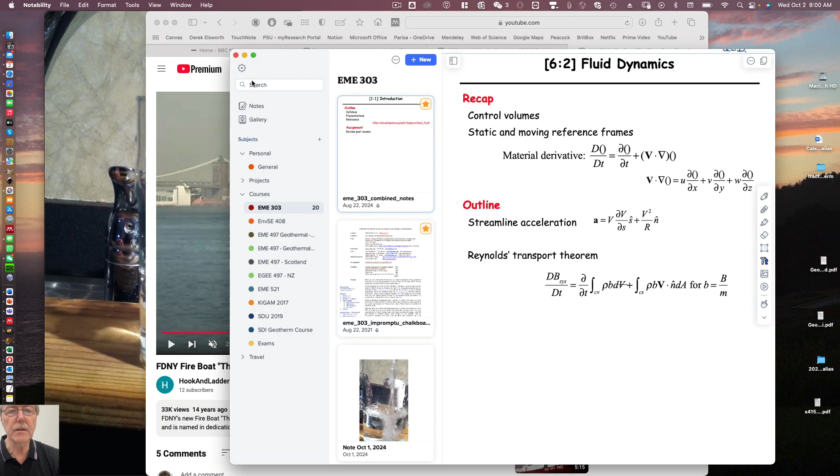And so the relative velocity is what we sometimes need to use to be able to take care of that. So we have to think about frames of reference. And so these two things demonstrate exactly that. And so that was Monday's online stuff. So we'll do a quick recap of what's going on.

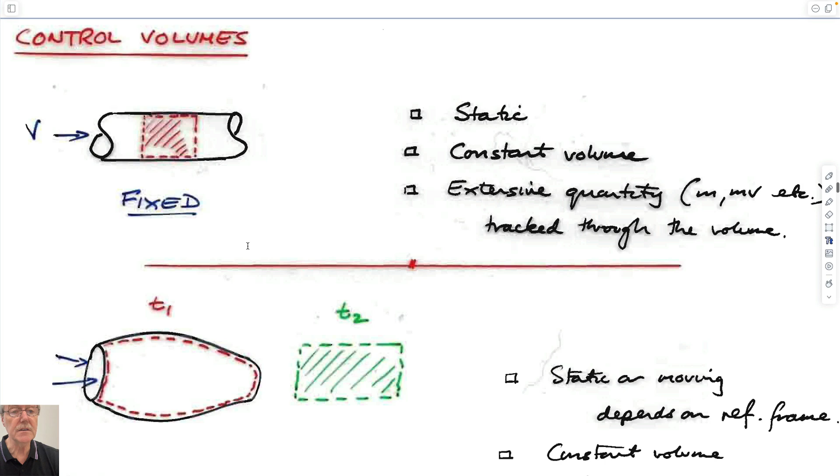Yeah, so the best diagrams to explain it are these. And so what we'll talk about today, now that on Monday you have some command of reference frames, is we'll talk about conservation of mass. Mass in minus mass out equals accumulation. And so we'll define some control volumes.

And these can be of three flavors, shown here. One is a fixed and static control volume, so it's fixed and constant volume. If you look at flow in a pipe, you can imagine a section of that pipe, Bernoulli upstream, Bernoulli downstream, has to be steady state. So the same mass flow rate has to be going in as is coming out if you're not accumulating material on the inside.

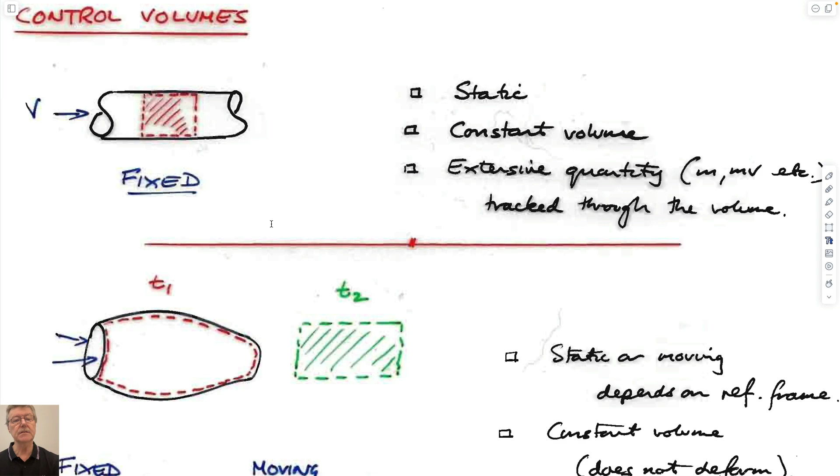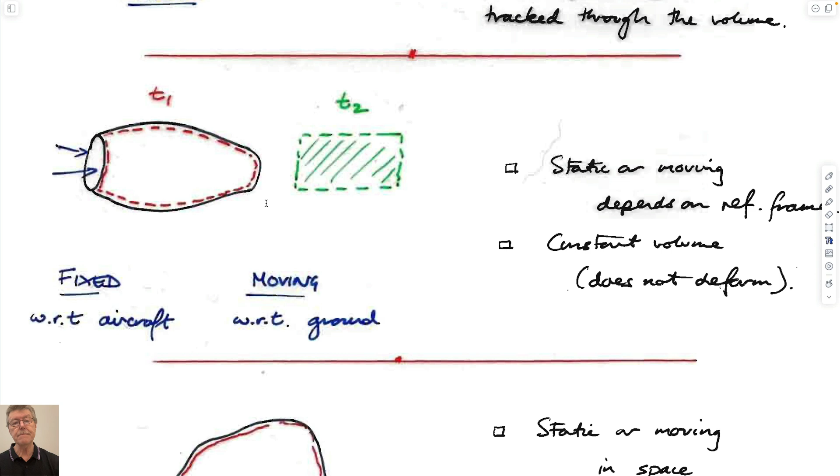You could think about a constant volume container, but one which is physically translating. So constant volume but translating, like a jet engine, I suppose. If it's sitting on the runway, then it's static. If it's moving along the runway or in the air, then it's physically moving from one location to another. And moving and deforming would be blowing up a balloon and just releasing it.

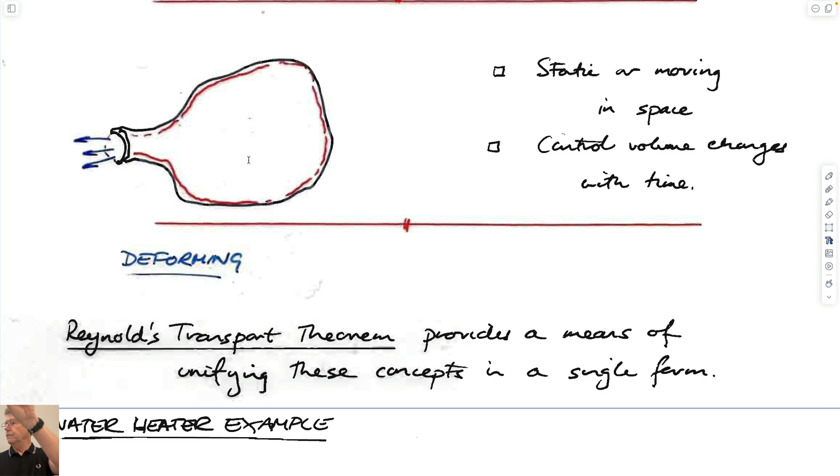You know exactly that two things will happen: it will be mobile because it will have a jet coming out of it, and it will also change its volume as it loses volume of air within it. So the reason we want to think of those three volumes is that those are the gamut of what we have: static and not changing volume, moving and not changing volume, and moving and changing volume are the three permutations of that behavior.

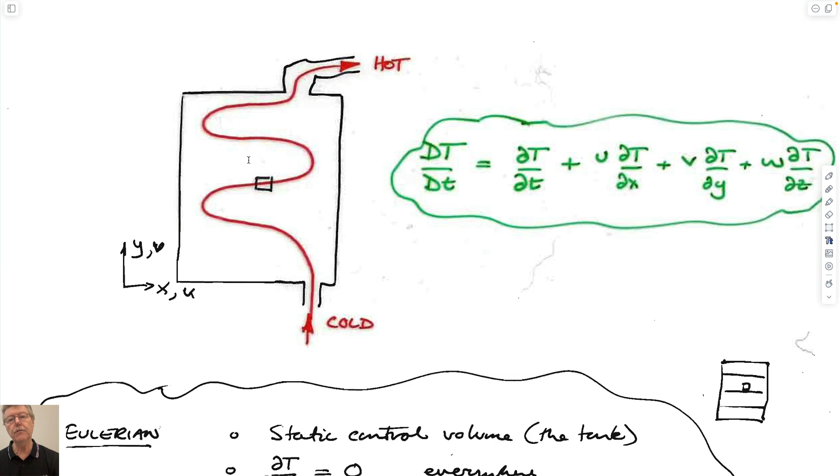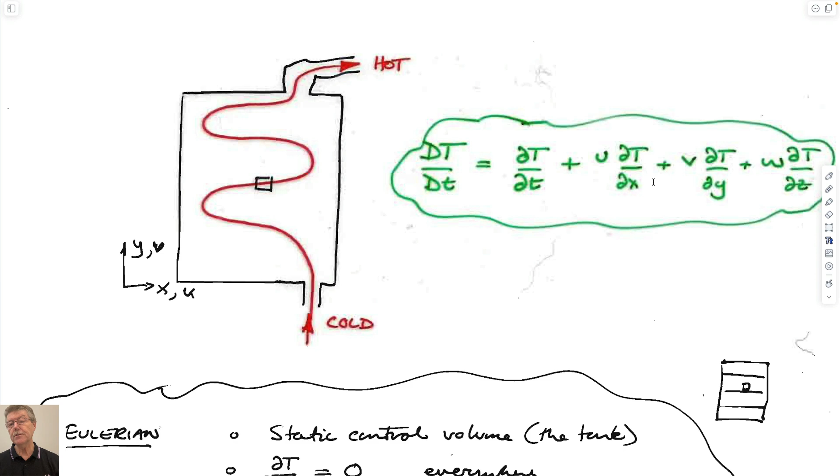We talked about material derivatives last time, and we'll cover that just very briefly this time. The example was a change in temperature as you go down into the earth. When you drill well bores, you often put tools down a well to look at geophysical signatures, gamma ray counts for clays, temperatures if you're prospecting for geothermal reservoirs. If you go down in a hole, the temperature you'll see if attached to that sonde would be a change in temperature with time, but you'd like to convert it to a change in temperature with elevation. You can use the material derivative to do that, and we'll follow that today. Won't go back through that.

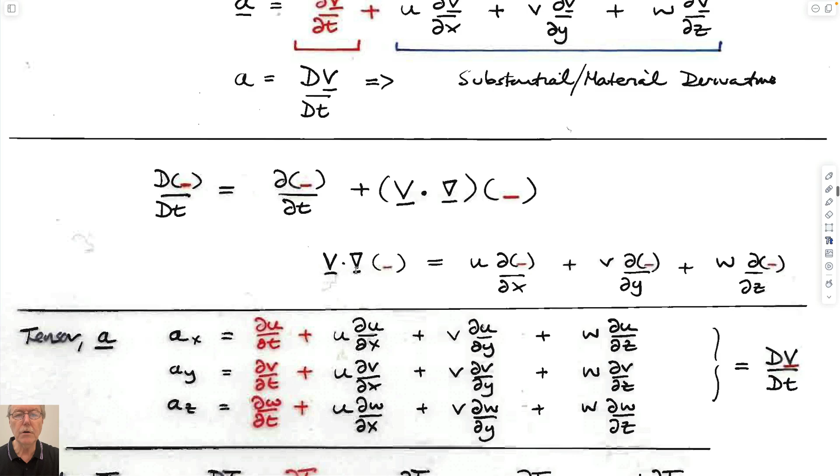For the material derivative, it's merely something that's attached to a person - this would be a mass attached to me as I'm falling through the sky, or Luke as it was. We can define it in terms of a fixed reference frame. We'll do a quick example to reinforce how behavior changes in time and how behavior changes in space. If you know how it changes in time and space, such as in Bernoulli going upstream and downstream, you can calculate how a particle of fluid going through that stream tube would behave in terms of its mass change or velocity change, typically. I won't go through that again, just note that's in the stuff to look at online. And just to reiterate that we've accommodated that here - that's control volume. So we'll talk very briefly about that, and more today.

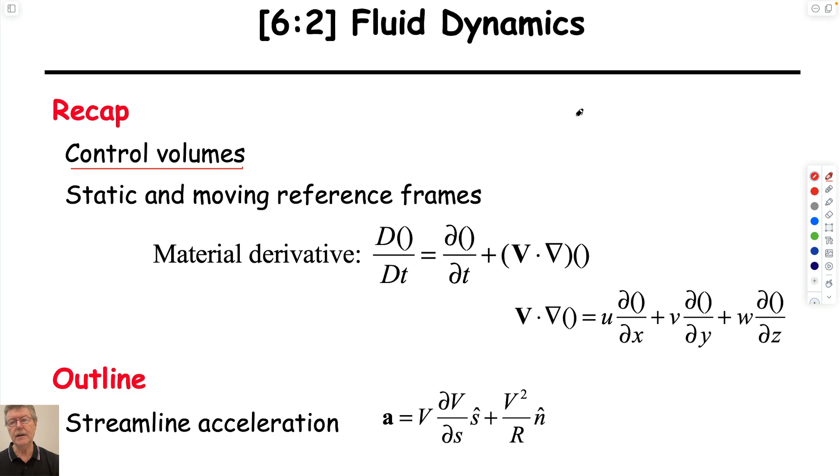The material derivative is pretty straightforward, we've kind of seen it. Perhaps I'll move down here and start again. It's worthwhile getting this lodged in your mind relative to things we've already done. We've talked about free jets, right? A free jet looks like this, and we have water coming out, we have a height. We know a couple of things about a free jet: we know that it accelerates as it goes downwards, and we could write a couple of points here. What did we do before? We called this one uppercase H, and we called this one lowercase h, I think, in the example we did.

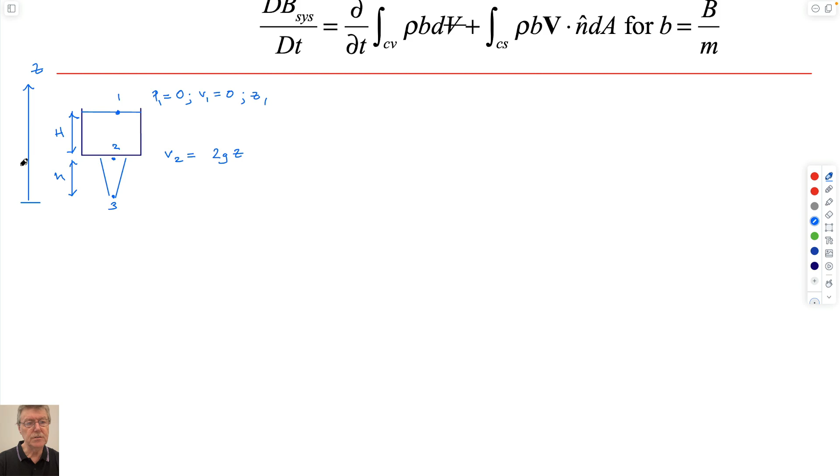We could write points 1, 2 and 3. We know that on this surface, P1 is equal to 0, V1 is equal to 0, because it's a big tank. So we know that Z1 relative to where we take our datum is given by that height. If we choose our datum at this point, we know the velocity at 2 from writing Bernoulli is the square root of 2gz - let's ignore that we're writing z upwards for now. We had also that nothing changes here, so this is also the square root of 2gz. The only difference between these is that this z would be uppercase H, and this z would be uppercase H plus lowercase h - the total distance. Because this is H plus h, this has to be bigger than this.

And so from continuity, V2A2 equals V3A3. So we know that A3 has to be smaller, so it must neck in. We said that.

And we could think of this also as being Luke. Well, that's pretty good, actually, isn't it? And Luke ends up here at some stage. If we magnified Luke to see exactly what Luke's shirt was, what would Luke's shirt say? He's our superhero - he's our substantial or material derivative. And so we know that the forces acting on bodies, which is really what Bernoulli is, equal mass times acceleration.

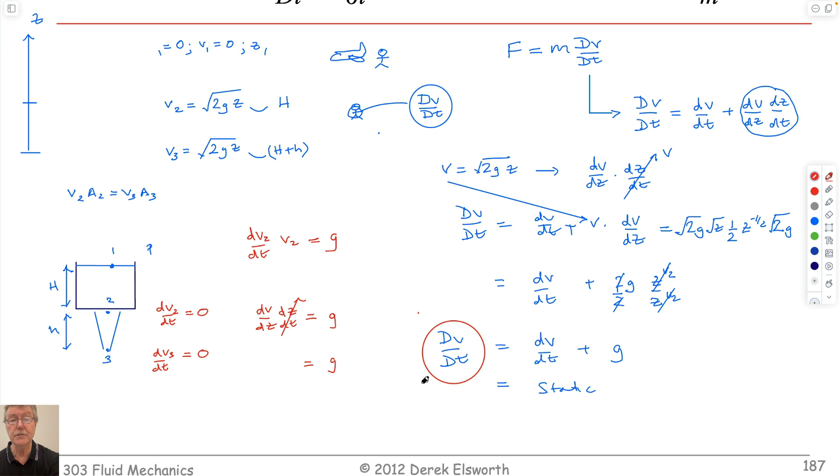So we'll go back to that as we go through it. So that was really what Monday's class was all about.

Did anyone watch Monday's class? Did you see the scores from the question, on the website for 2021? Yeah, we should watch. I was going to say, one reason to see 2021 is you'll see the scores from the first test were something like 28%, 30%, 68% for the first three tests. So based on the averages for your first test, they worked out quite well. Okay, yeah, so it doesn't change much. I just say the same thing each year.

Not very original, I'm afraid.

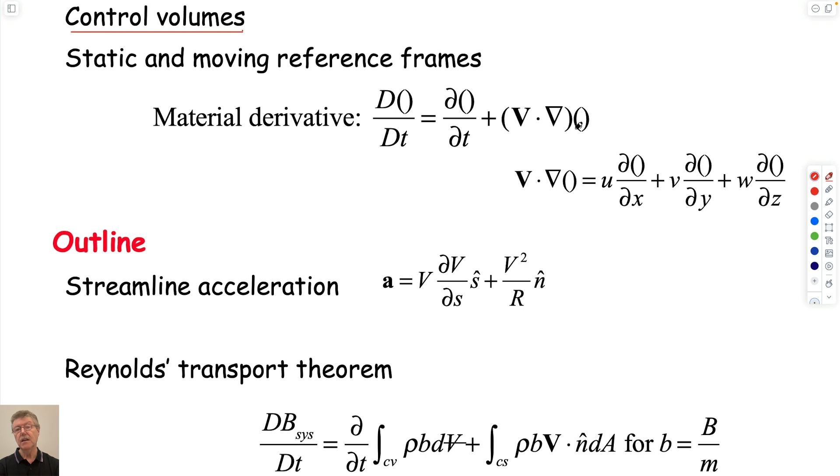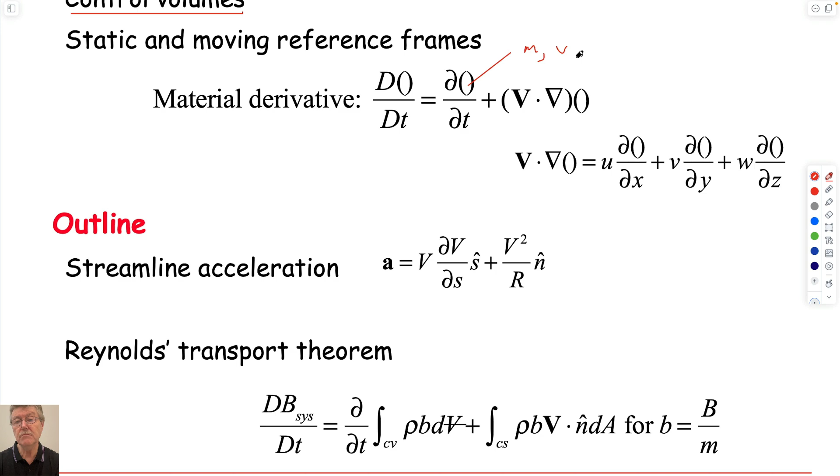So that covers the so-called substantial derivative, also called material derivative. It depends on something, some quantity changing with time. Bernoulli's steady state: if you take a picture upstream and downstream, those quantities aren't changing, and changing in space, which is this second term. And clearly it is changing in space vertically. It can be any quantity - this could be mass, velocity, temperature, or any kind of thing you could use.

Secondly, let's do this relatively quickly - it's a bit esoteric. Streamline accelerations depend on components related to changes in velocity along the streamline, both along the streamline and normal to the streamline. So if we want to work on accelerations, it's easy to draw a figure - streamline accelerations like this.

This is a radius, this is a streamline velocity. This is a streamline vector, this is a normal vector, n hat. This is velocity along a streamline.

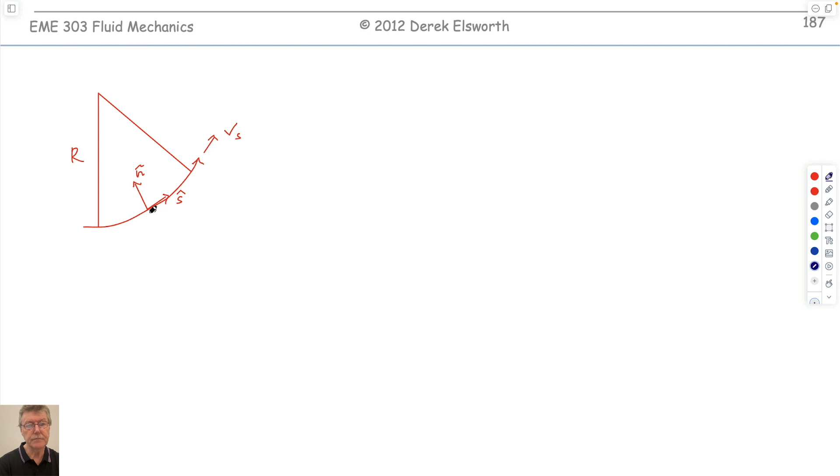And I guess we could write on top of that accelerations in the x direction and accelerations - I think I chose y in this particular case, so let's just choose x and y.

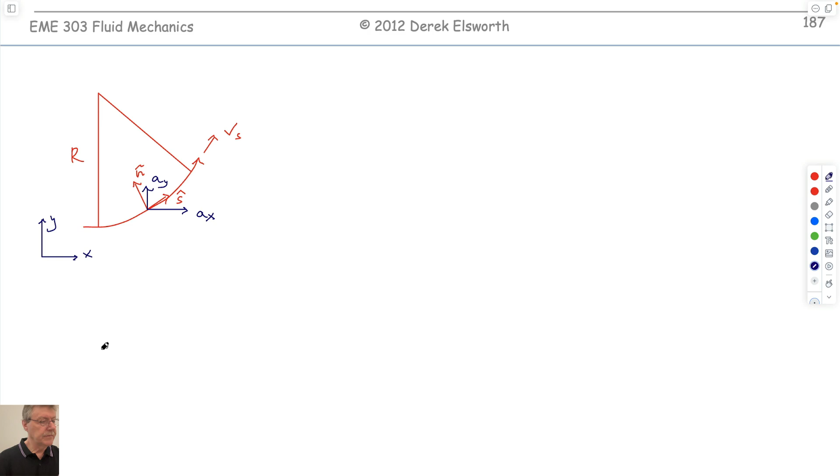And so we know that the velocity occurs along a streamline. Let's see if I can get this to work... I don't know if it'll drag this or not. Oh, no, it's not - fine, I'll just write it out.

So we can get from this: the acceleration along a streamline is equal to the velocity times the rate of change of the velocity along the streamline, multiplied by this vector s, plus v squared over r times a vector n.

And so if we want the velocity, the acceleration - this is a vector in x, y, and z. So we need to know what the components of the acceleration are in terms of along a streamline.

So this vector along the streamline is always a unit vector, of length 1. If we look at the components of that in x and y, we could write this as being 1 and 1, and this then would be square root of 1 squared plus 1 squared, which is square root of 2. And so this is the vector s. We could also divide these through by 1 over square root 2 and 1 over square root 2, so this indeed is equal to 1. And so these would be the components of the vector in each of the x and y directions.

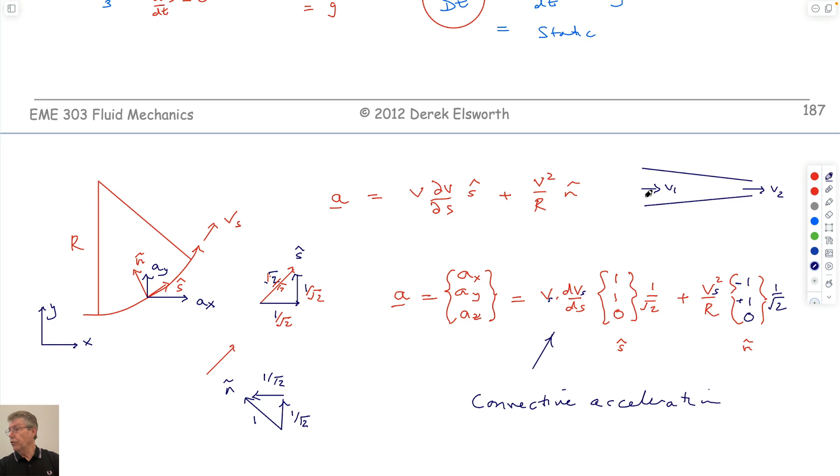What that means is that instead of dv dt, if you're attached to this, it means as you go from upstream to downstream. If you look at the free jet that we had before, we know from continuity that velocity v1 is smaller than velocity v2. So the velocity is changing as we go along a streamline, and it's accelerating. Even though the velocity is constant here and constant here, a packet of water as it is carried downstream is accelerated by this so-called convective acceleration. It means that it's carried in space. So useful to know. So relates to this.

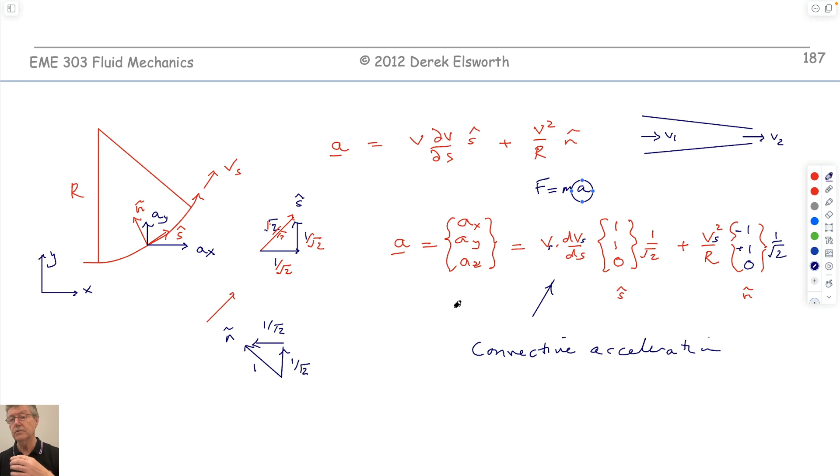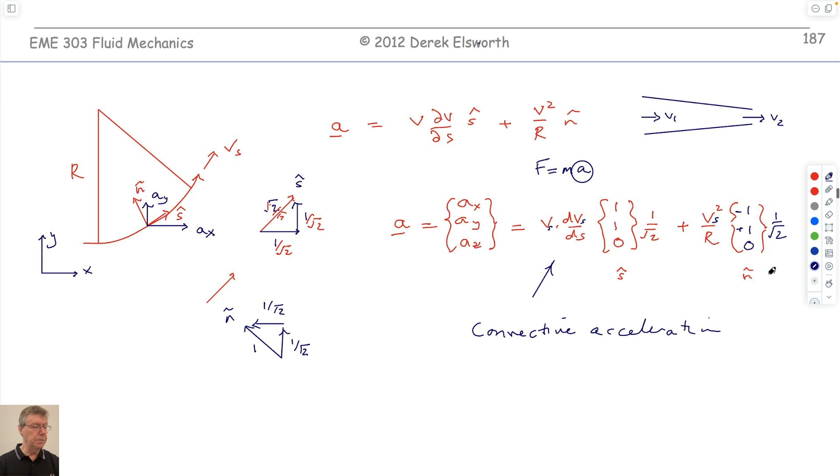And of course, this term here, v dv ds, is the same as f equals ma. We've already just discussed that the acceleration we can write relative to Luke, who's falling through the sky, as in this, or we can write it in terms of a static frame of reference, which is what this is, looking at it going downstream. That's really the transformation that we're doing. So a little bit complicated, but maybe it'll make better sense later on.

Okay, so that's kind of the first part of today. The more substantive part of today is that now for week 6, 7 and 8, we'll look at conservation laws. So 6 is conservation of mass, 7 is conservation of momentum, and 8 is conservation of energy.

Conservation of mass is: you have a 10-liter bucket, you're filling it at 1 liter per second. How long does it take to fill? 10 seconds. That's conservation of mass. If you have an inflow and no outflow, the rate at which it accumulates you can calculate by using this overly complicated expression, but it's useful because we can apply it to these other conservations.

If you wanted to write a conservation along a streamline, then actually what we've just talked about is that if fluid flows down a streamline, just as we talked about right now, then if we conserve momentum, mass times velocity along that, then you know that we can write this in terms of Bernoulli as pressure divided by unit weight plus elevation plus v squared over 2g equals constant.

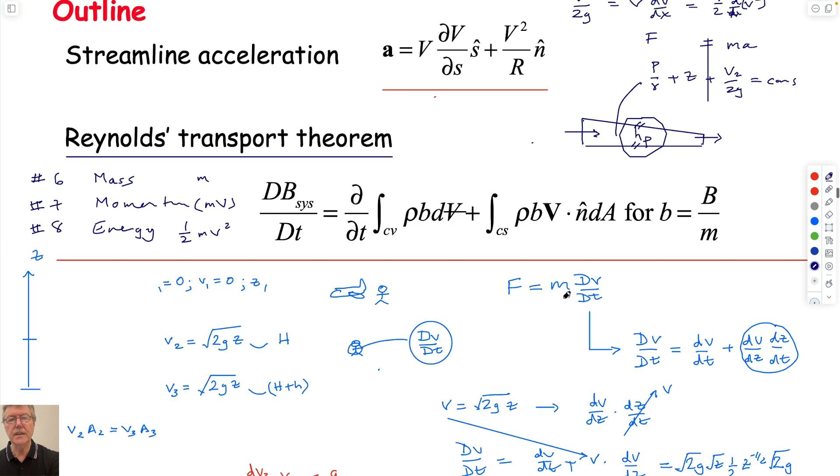And for each of these characteristics, we can use this rather complicated thing called Reynolds Transport Theorem, which looks like this, which looks kind of complicated, but let's try and explain it in terms of some good physical explanations. So this is the stuff we've done this morning in terms of this.

So this is the idea. We can define Reynolds Transport Theorem, as in Osborne Reynolds, as in Reynolds number, which you've perhaps met in passing. And it really is something that can be written for any quantity. So we can choose this quantity to be mass or momentum or energy

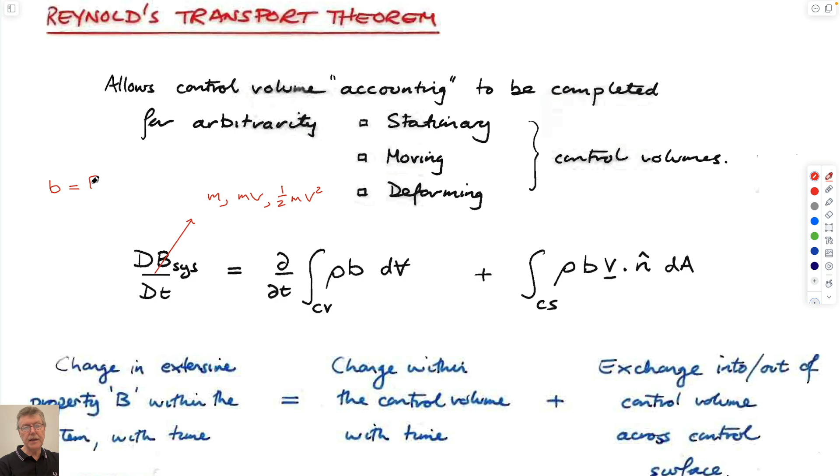and substitute it in here. And I think that the quantity b is equal to uppercase B per unit mass. Should check that before I write that. Yes, you see it down here.

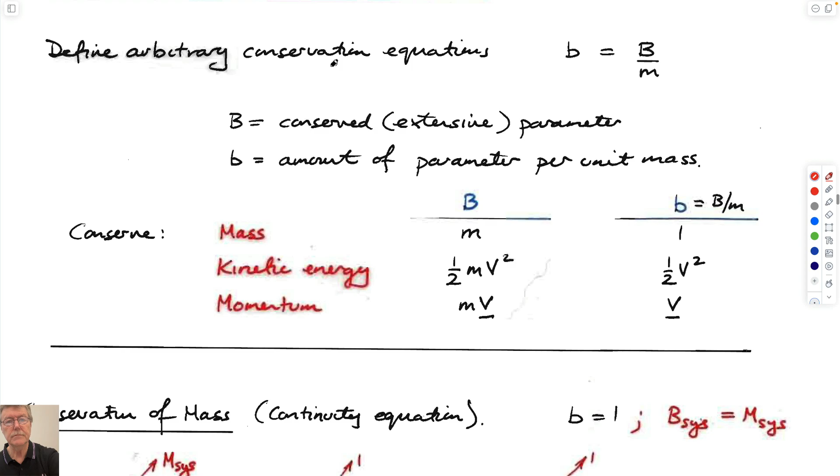And so this just gives us a formalism of being able to define things. And really what this says is that this is rate in minus rate out equals rate of accumulation of whatever quantity that we choose.

It's just, it balances it. So it's easiest to think in terms of mass. So mass rate in minus mass rate out. 10 kilograms a second into a bucket, 10 kilograms a second out of the bucket, there is no accumulation in the bucket, and in equals out.

And so this term actually ends up being equal to 0 in the first case that we're looking at. If the rate is 10 kilograms a second in and nothing is flowing out, then the rate of accumulation will be 10 kilograms per second into the container. That's really what it's saying.

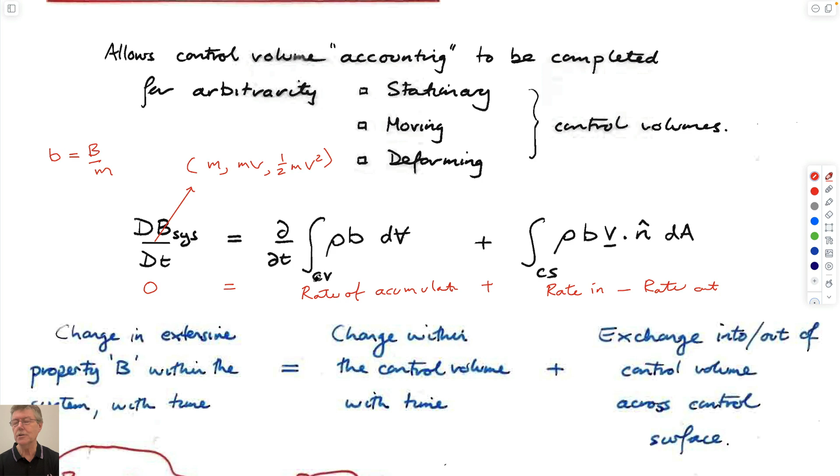It's saying it with some integrals and some differentials, but those we can understand in terms of just rates of flow across boundaries. So think of it in terms of that. We can also write this in terms of stationary, moving, or deforming control volumes. We won't do, well, actually we will do that perhaps on Friday, but not today.

So let's do this just for the case that we're looking at now and talk about what these equations are. This is density for us, well, if we do this for this. So B is equal to mass. Lowercase b is equal to mass per unit mass, which is 1. And so for this ends up being 1 for our case. This ends up being 1 for our case.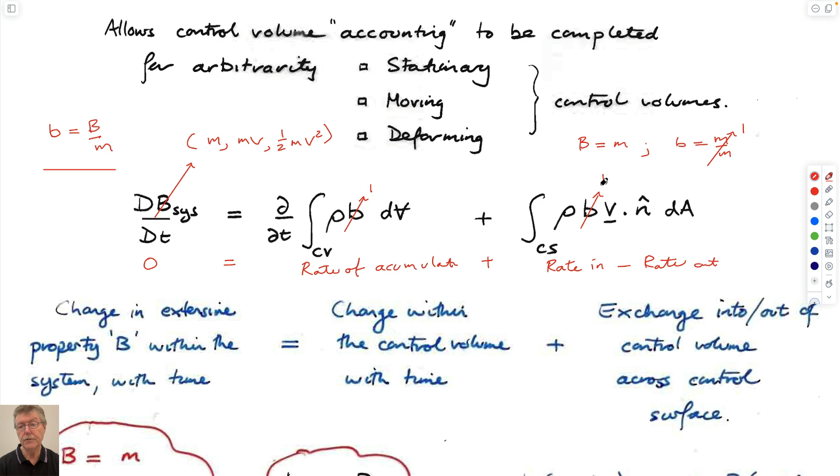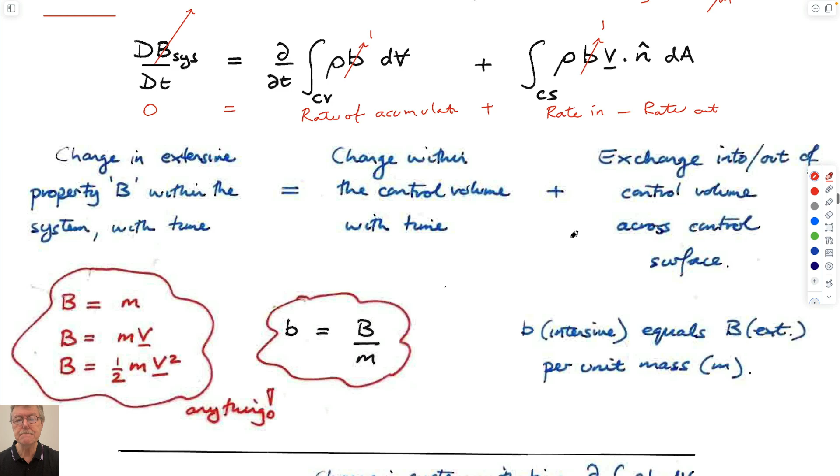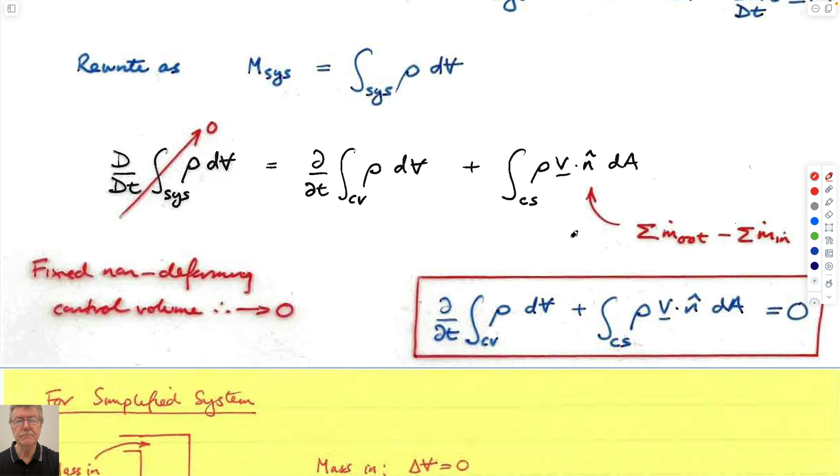And we can just concentrate on what these physically mean. And so we'll describe them not in terms of differential calculus or anything. We'll try and define them in terms of physical properties, in terms of what's going on. So, well, we've said this. Fine. I'm going to go back. I'm going to start writing stuff down so that we can talk about it and explain it.

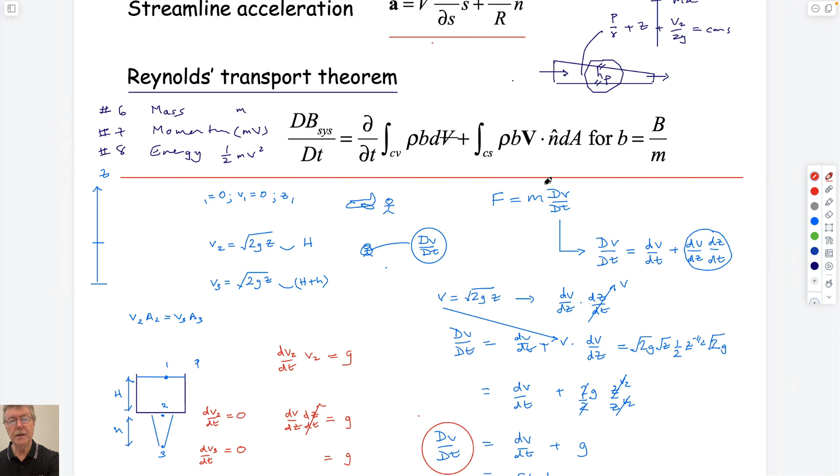So I'm going to write Reynolds transport theorem down. Apparently I can't copy it, so maybe I'll make it small so I can actually get it right. I'm just going to write this down. So we're starting a new term. You can get conservation of mass. So d uppercase B dt, substantial derivative, is equal to rate of change with time,

integral over the control volume, CV, density, I'll write in B, even though we set it equal to 1, times dV, plus integral over the control surface is what CS is, rho times B times V dot N, dot product, times dA.

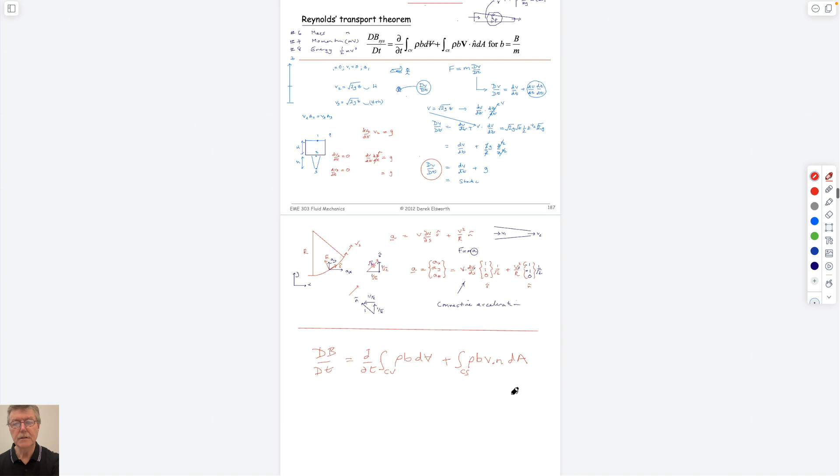So I'll make it big. So bad writing when you... So let's see what we talked about from before, and let's see how it makes sense.

So we'll choose that for conservation of mass, the extensive quantity, I guess it's called, is equal to mass. The intensive quantity is the extensive quantity per unit mass, which is equal to mass over mass, which is 1.

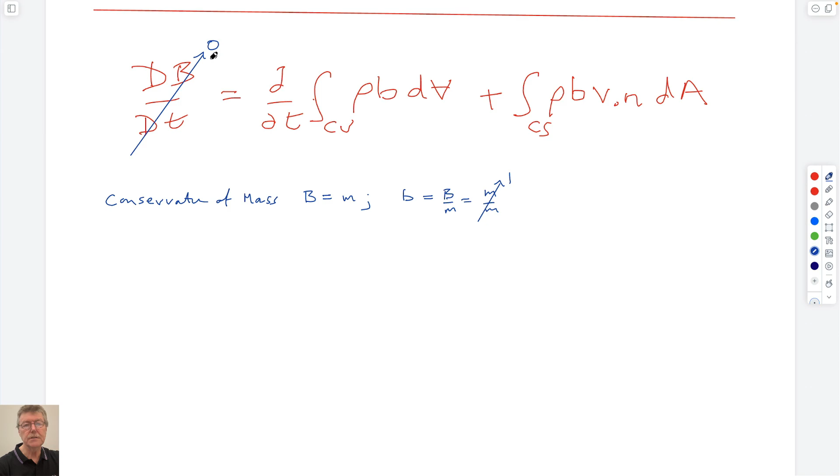This is the total amount of mass in the big system. The big system isn't changing, and so for our intents and purposes, this whole term is equal to 0. We've said that lowercase b in both cases is equal to 0, is equal to 1 rather.

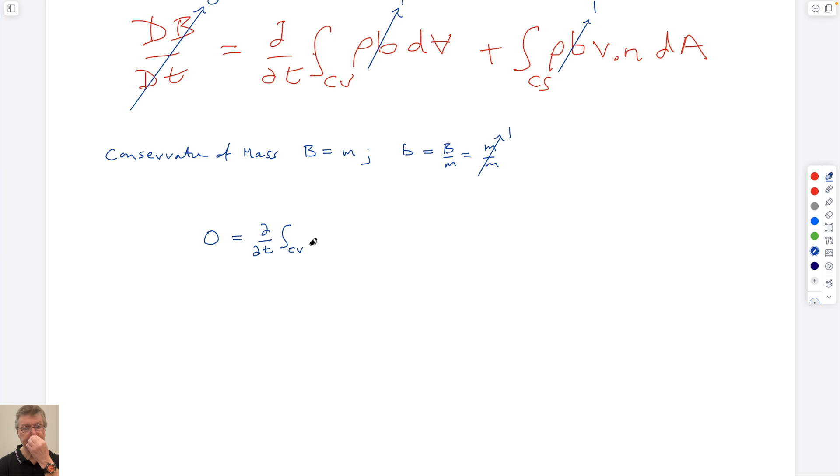And so what this term ends up being is that 0 is equal to a rate of change of something with time across a control volume, in a control volume, times the density times the change of that volume, plus an integral over control surface times density, times a velocity dot product over an area.

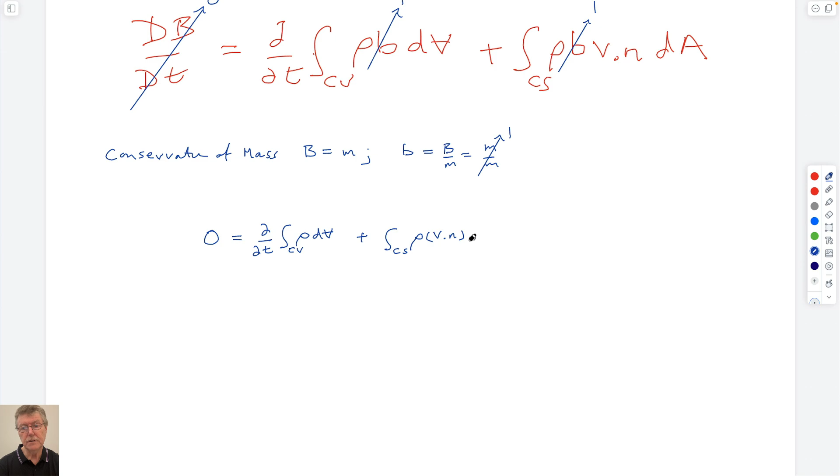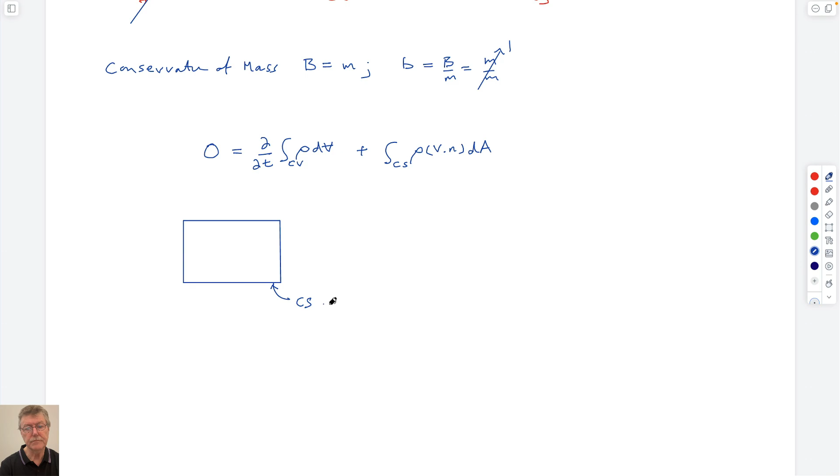And so it's probably easiest to think of this in terms of just a, could be a, let's have a streamline that we've got. And this blue contour is our control surface. This volume here is our control volume.

This, if you like, and I guess this is dA, area. And so we know, for instance, that if we have a...

Say we have a control surface, and we have fluid going across that at some velocity. This is a velocity now. What we'd like to do is be able to calculate a unique value for that velocity normal to that boundary.

The only way we can do that is there's a velocity here, and of course there are components to that velocity relative to that. We'd like to know what the velocity is that's normal to that boundary, and the velocity normal to that boundary is just equal to the dot product. It would be this velocity times the cosine of this angle here. If you think about a dot product, it's just the component of this velocity flowing across this control surface that is normal to the boundary, because that gives us a unique value of that flow rate.

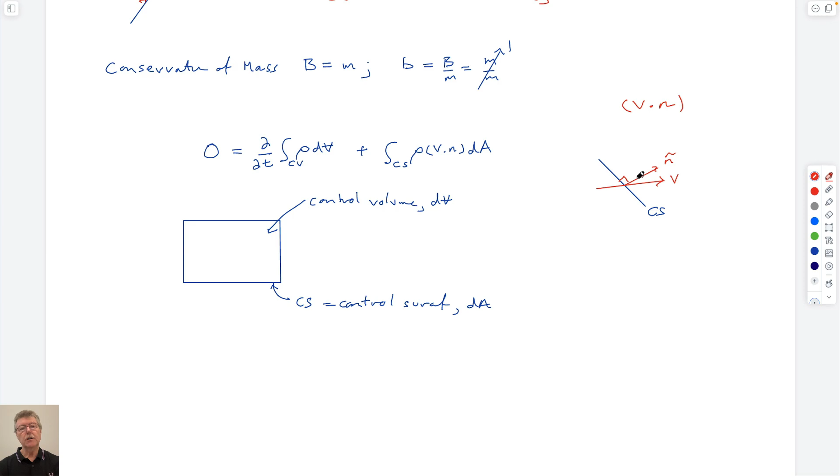So if we looked at flow rates across this, let's say we have V1 here, we have V2 here. You could think of this as a stream tube, so there's no flow going across this boundary. And so this would be...

This boundary would be of some length, actually let's call it A1, not dA1. This area is A1, this area is A2, A3, etc., or A4 rather. Obviously they are lengths, but they have lengths into the page.

And so let's write this equation out. It says that 0 is equal -- let's write this a little bit differently. Let's write this as rate of change with time of density times volume. I've just taken this thing out here and put it in here. Plus density times the velocity that's normal to this surface multiplied by its area, right?

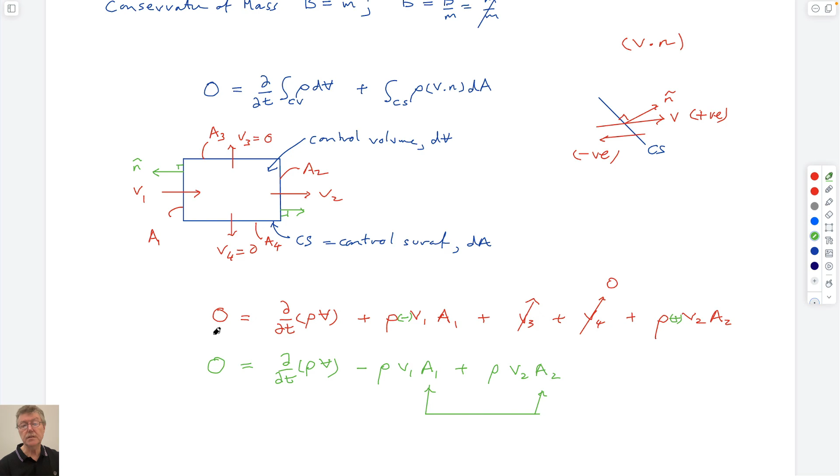And so, accounting for this, this merely says that this is equal to rate of change with time of the product of density and the volume, minus density times V1 A1, plus density V2 A2. And so we haven't said it, but if A1 and A2 are the same, then we know by definition that V1 and V2 have to be the same, right? Velocity. And so there can be no net accumulation.

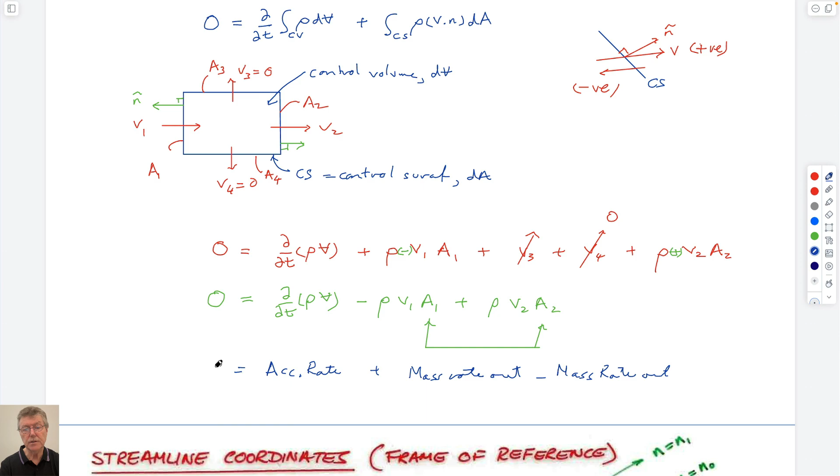So we can write out what those terms are in terms of what we just said. This is accumulation rate plus mass rate in -- I guess it's mass rate out, minus mass rate in, from our sign convention, right? If it's in, it goes across this boundary, so this is negative. So this is mass rate out minus mass rate in, has to equal 0. So that's this very complicated expression, and physically what it means is that if you have stuff going into the bucket and stuff going out of the bucket, if it goes in at the same rate it comes out, then it doesn't accumulate.

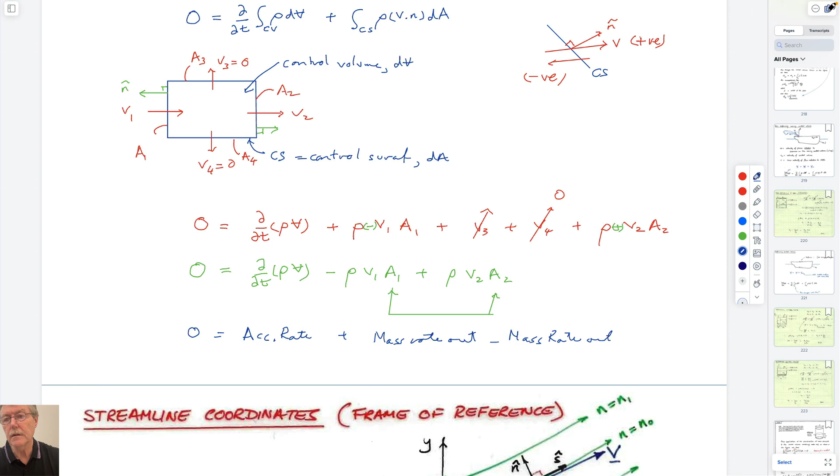If we want to take it the next step, I want to add a page. So we just keep on doing this. So the other thing that we can do with that expression -- everyone okay with this, I guess I should ask? It's quite an important concept.

If we write this out, we could also write this as 0 equals -- let's differentiate this in parts: rate of change with time of density times the volume, plus density times rate of change of volume, plus density, velocity times area. That's this expression, this, what we've boiled down to, yes?

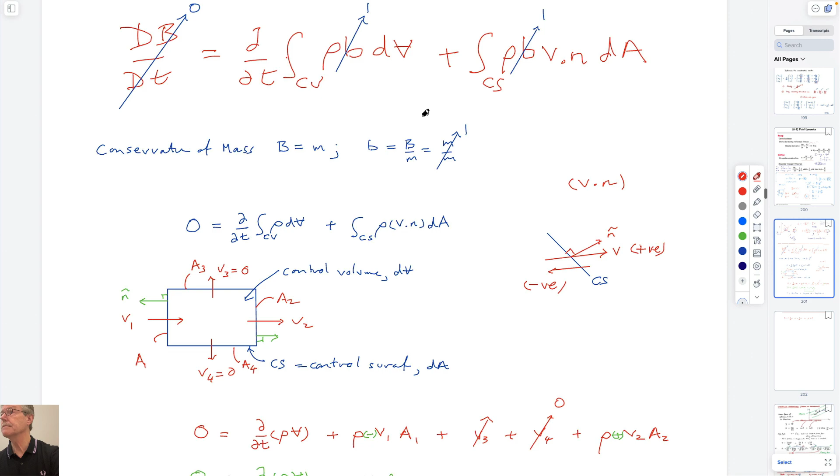Is it accumulation rate plus mass rate out minus mass rate in, or is it mass rate in minus mass rate out? The sign convention is, I'm not sure exactly how to write it, but if mass is going in, it's a negative sign in this relationship. If mass is coming out, it's positive, because this outward normal to the boundary is aligned in the direction of the velocity. So this is a positive velocity, so this is positive here, and this is negative.

The reason is a bit complicated. We work in terms of x and y, and this is worthwhile doing. So by definition, this is V1, forget what I said here. This is positive by definition.

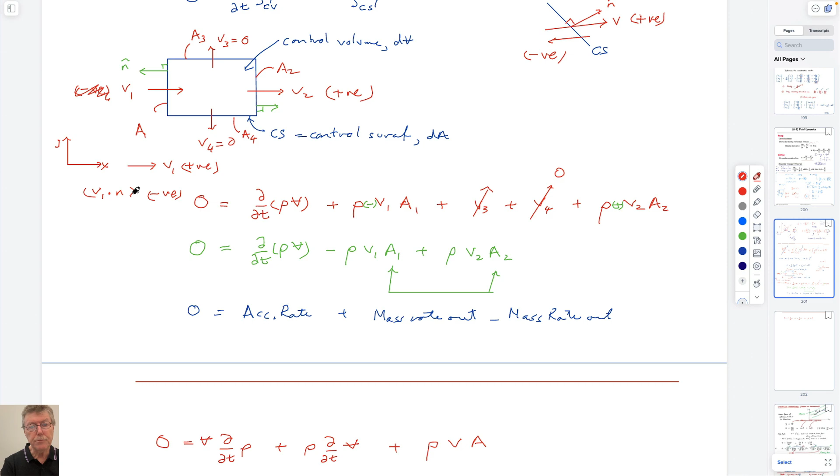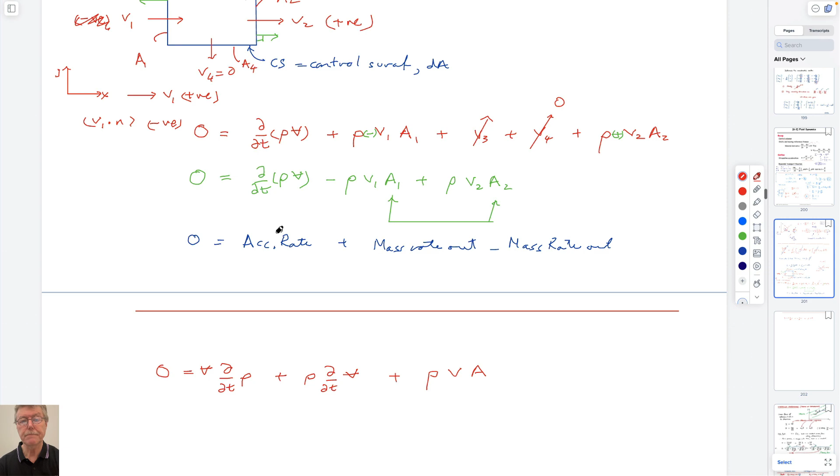If theta is equal to 180 degrees, then cosine 180 is minus 1, which is what this dot product is multiplied by. So it comes out negative. It's basically saying the component of this velocity in this direction is minus v1. So this is the basic expression you'll have to use - you can think of it in these terms rather than this integral.

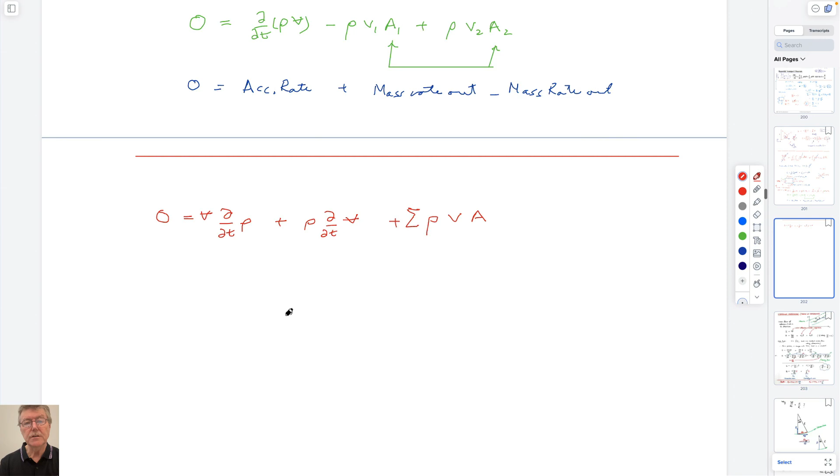And you can think of two examples, I suppose - they're written out. Take the tire example. Ignore the fact that a tire gets a bit bigger when you pump air in.

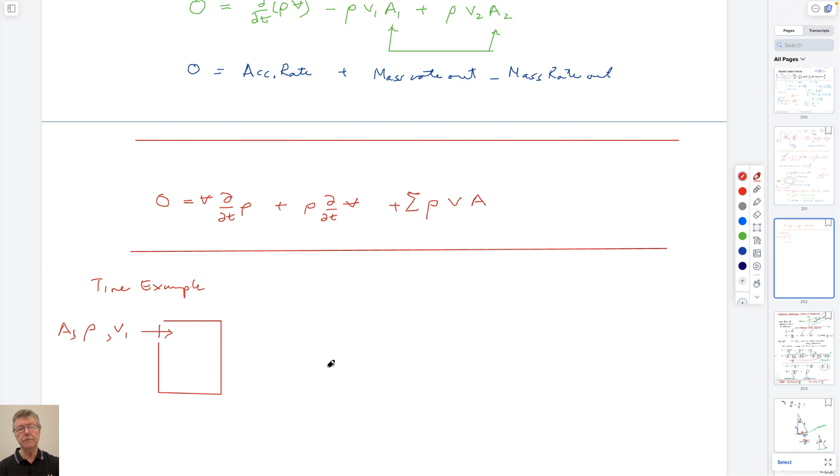So if we wrote this expression for this, this would give us - take note of the V's with bars through them and the V's without, velocities versus volumes. So if we wrote this conservation equation, what would that give us? We have the volume of the tire multiplied by the rate of change with time of the density of the fluid we're pumping in.

You know the pressure goes up when you inflate a tire, and from the ideal gas law you know pressures and densities are linked - don't need to write that out. Plus density times rate of change of volume with time. Imagine it's a steel-belted radial - volume doesn't change with time because it's very rigid. So the volume changing with time is 0.

And the sum of density times velocity 1 times area 1 is finite. So the density is the air going in, going in at some velocity over the area of the valve. So this is a rate in. In this case, V1 dot n, this is V1, but the unit normal is outward, so V dot n would equal minus V1. So this would be minus. Everything else is positive - density is positive, area is positive.

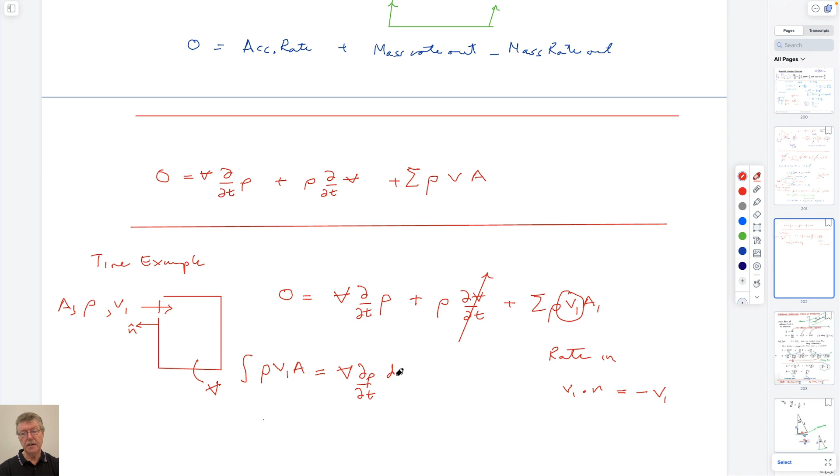So if we define this behavior as the integral between 0 and 1 of density as it's coming in times the area times the velocity, and we integrate with respect to time, that's just t1 minus t0, which is the duration. And that is equal to the volume multiplied by the integral from 0 to 1 of the density, which is equal to the volume times density 1 minus density 0, if you do it in the same units.